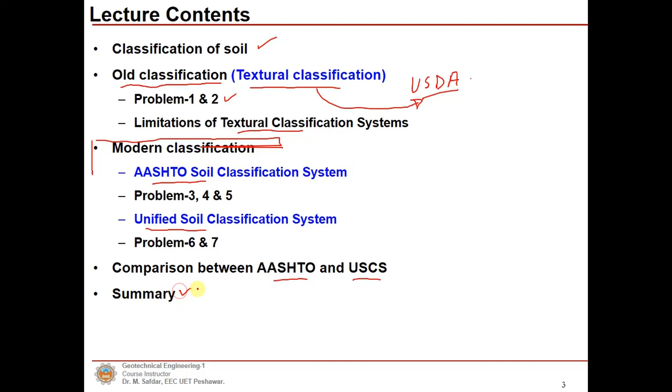Now, soil classification is the arrangement of different soils with similar properties into groups and subgroups based upon their applications. Now, what are those similar properties? For example, the compressibility of the soil. We can say strength characteristics. We can also say the permeability.

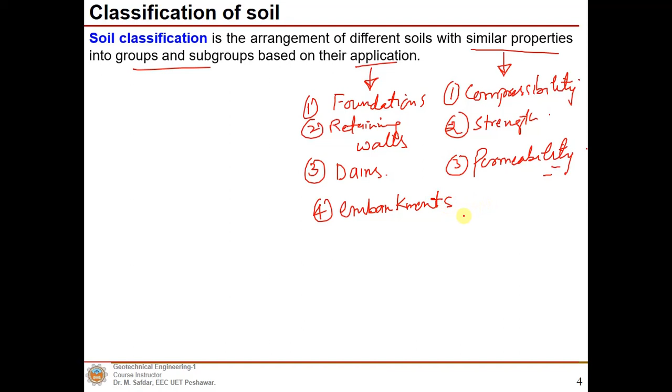Soils are classified in groups and subgroups based upon these properties. Now, based on the application, we can use them for foundations, retaining walls, dams, embankments, and so on. Now, different soil classification systems are available.

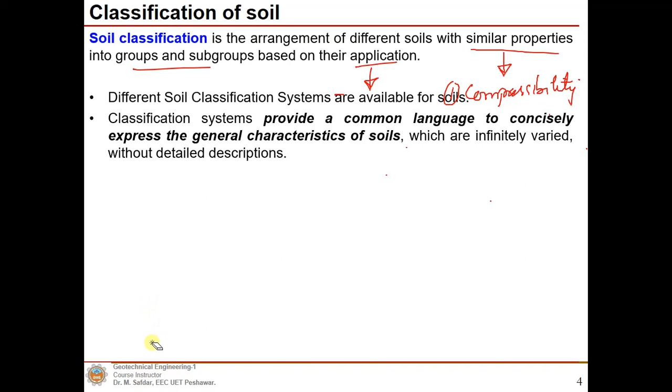So classification systems provide a common language to concisely express the general characteristics of soils, like compressibility, strength, or permeability characteristics, which are infinitely varied, without detailed descriptions. Most of the soil classification systems that have been developed for engineering purposes are based on simple indices such as particle size distribution and plasticity.

We already discussed particle size distribution, sieve analysis, and hydrometer analysis in our previous lectures, so you can refer to those if you want to understand how we do the particle size distribution for fine grained and coarse grained soils. We also discussed the plasticity of soils, for example liquid limit, plastic limit, and shrinkage limit, and in good detail how we can find out these limits.

Now, a soil classification system represents in effect a language of communication between engineers. When we are dealing with projects, structural engineers, water resource engineers, geotechnical engineers, and environmental engineers need a common language to talk about soils, and therefore a system is needed to communicate between these engineers during the project.

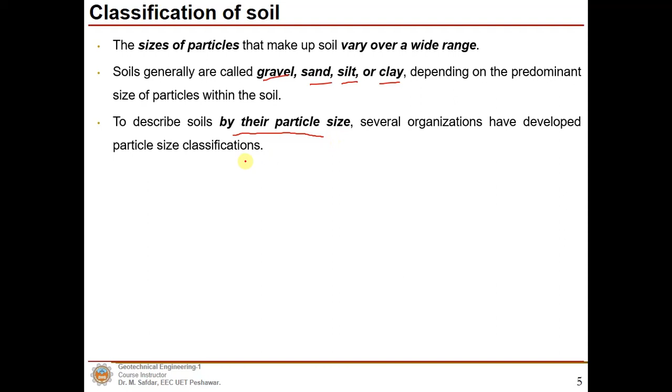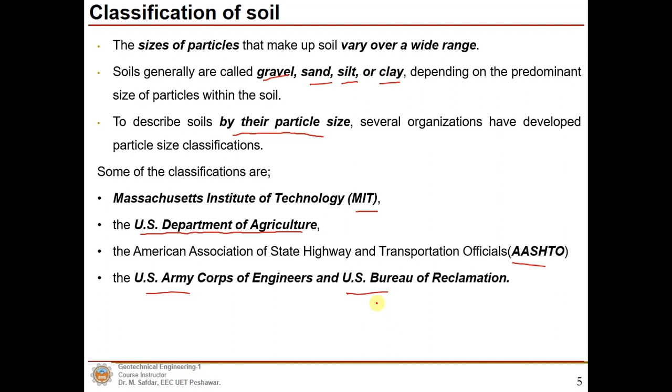Now, the sizes of particles that make up soil vary over a wide range, but soils generally are called gravel, sand, silt or clay, depending upon the predominant size of particles within the soil. To describe soils by their particle size, several organizations have developed particle size classifications: the Massachusetts Institute of Technology, or MIT, system; the USDA, or US Department of Agriculture, system; the AASHTO, or American Association of State Highway and Transportation Officials, system; and the US Army Corps of Engineers and US Bureau of Reclamation, which also proposed a soil classification system.

Now, this table shows the particle size classifications. The name of the organization is given in the left column. Gravel, sand, silt and clay sizes are given in millimeters. For example, in the USDA, or US Department of Agriculture, system, a gravel is a particle having a size greater than 2 millimeters.

Sand is a material having a particle range of 0.05 to 2 millimeters, and silt are those particles having a range of 0.05 to 0.002 millimeters. Anything less than 0.002 millimeters will be known as clay size particles.

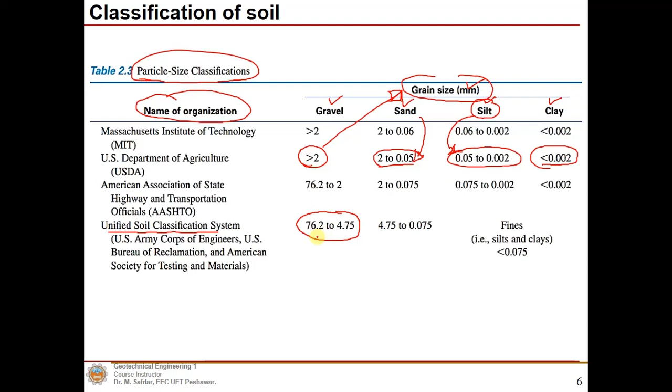Now, in the Unified Soil Classification System, any particle which ranges between 4.75 millimeters and 76.2 millimeters will be known as gravel, and any particle which ranges between 0.075 and 4.75 millimeters will be known as sand.

Now, the USCS, or Unified Soil Classification System, classifies silts and clays together, and any particles smaller than 0.075 millimeters are known as silts and clays, or fines.

Now, the classification systems developed in the past can be grouped into two major categories. One is the older classification, based upon textural classification, which is based on the particle size distribution, the percent of sand, silt, and clay size fractions present in a given soil. However, the modern soil classification systems take into account the particle size distribution and the Atterberg limits, for example liquid limit and plasticity index.

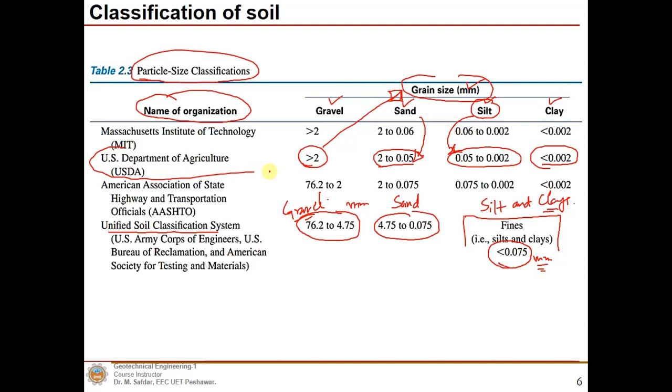Now, gravel is a particle which is greater than 2 mm. Sand is a particle which has a size in the 0.05 to 2 mm range. Silt: anything between 0.002 and 0.05 mm will be known as silt size material, and anything less than 0.002 mm will be known as clay size material.

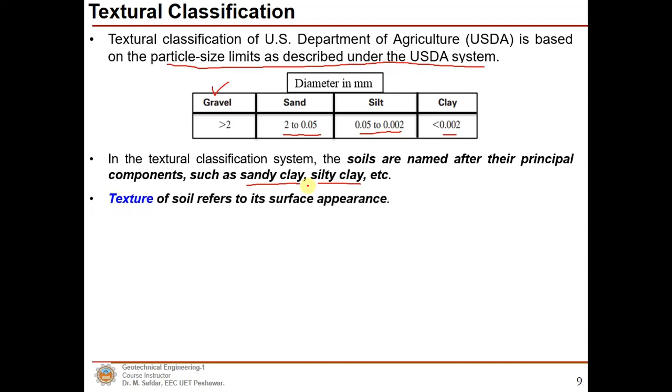In the textural classification systems, the soils are named after their principal components, such as sandy clay or silty clay. Now, texture of the soil refers to its surface appearance as well. Soil texture is influenced by the size of the individual particles present in it. Mostly, natural soils are mixtures of particles from several size groups. Based on the percentage of each particle size, for example sand, clay and silt, the soil type is determined.

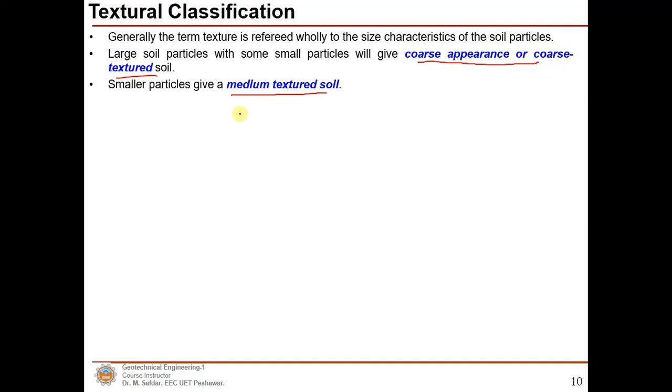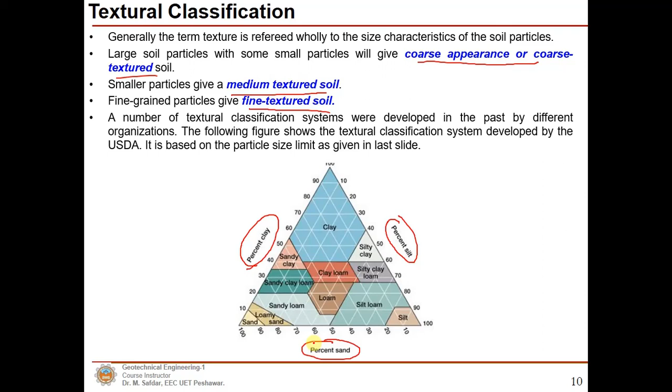Now, generally the term texture refers wholly to the size characteristics of the soil particles. For example, large soil particles with some small particles will give a coarse appearance. The following figure shows the textural classification system developed by the USDA, and it is based on the particle size. Sand is plotted at the bottom, up to 100% of sand.

Now, different regions are divided. For example, this one will be known as clay. This one will be known as sandy clay loam. This one would be known as loam. Here we have sand. Here we have silt, or silty loam as well.

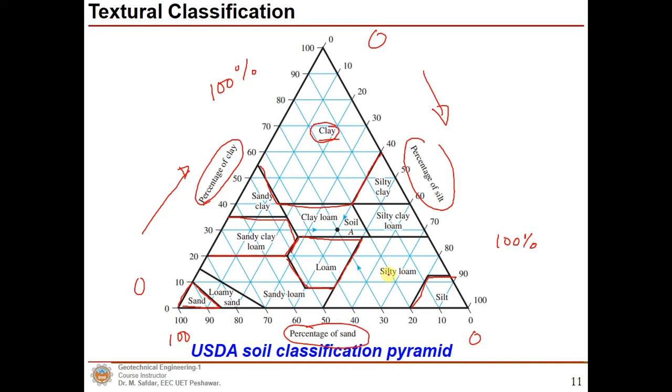Now we will solve a simple problem on it, then you will understand how we can find the soil classification based upon the US Department of Agriculture system. We need to find the classification of the soil which contains 30% sand, 40% silt and 30% clay.

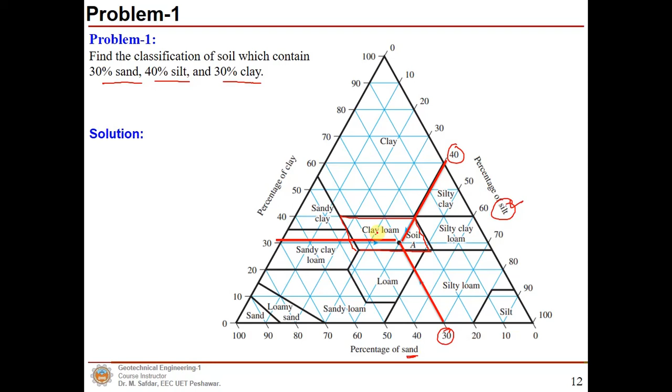Now, we can draw a line for 30% of the sand, and a straight line from 40% of the silt: 30% for the sand, 40% for the silt, and 30% for the clay. Now you can clearly see that this intersection point lies in the region of clay loam, so the soil can be classified as clay loam.

Now, loam soils are best for plant growth because sand, silt and clay together provide desirable characteristics; they leave spaces in the soil for air and water to flow and roots to penetrate. So these are the desirable characteristics.

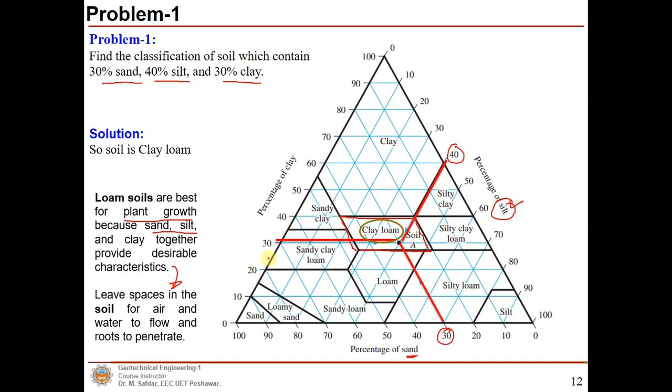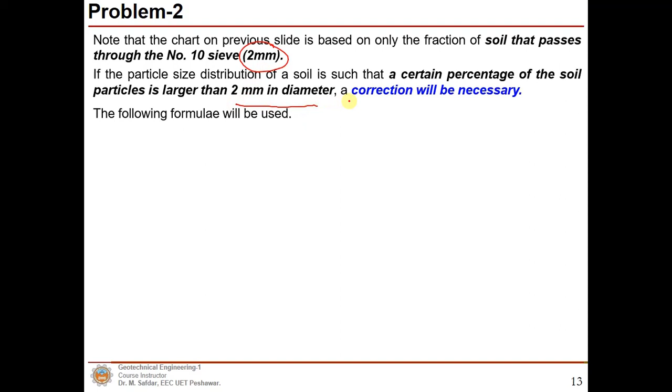Now, you need to note that the chart on the previous slide is based only on the fraction of soil that passes through the number 10 sieve, having a size of 2 mm. If the particle size distribution of a soil is such that a certain percentage of the soil particles is larger than 2 mm in diameter, a correction will be necessary. Now, the following formula will be used.

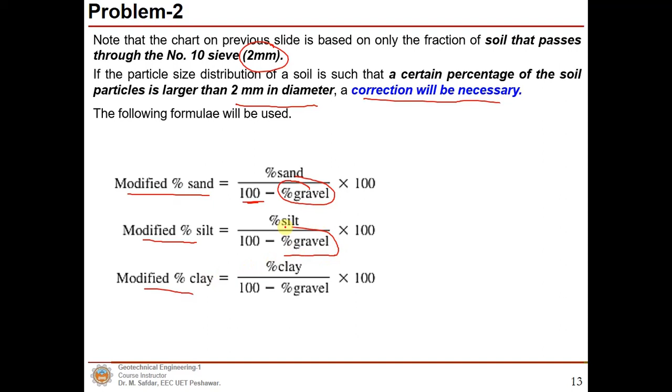We need to modify because we don't have any gravel percentage in that previous figure, so we need to subtract the percentage of gravel from 100%, and similarly we need to modify the percentage of silt and the percentage of clay by subtracting the percentage of gravel from 100.

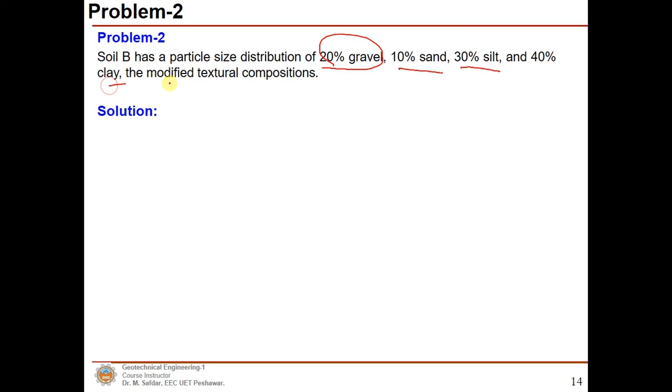Let's solve a simple problem. Soil B has a particle size distribution of 20% gravel, 10% sand, 30% silt and 40% clay. Now we need to find the modified textural composition. For the sand size, we subtract 20, which is the 20% gravel, and we get the modified or corrected sand percentage, which is 12.5%. The corrected silt size percentage would be 37.5%, and the clay size would be 50.0%, by subtracting the 20% of gravel.

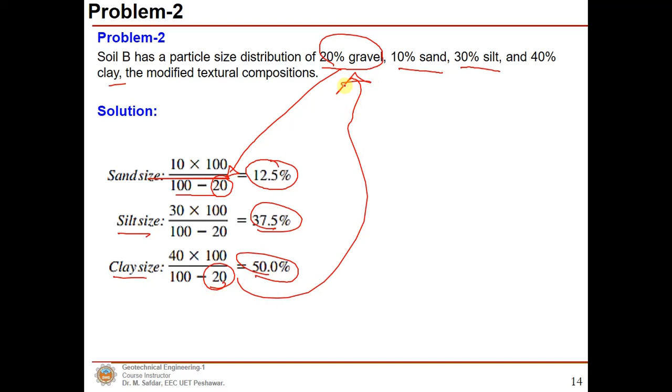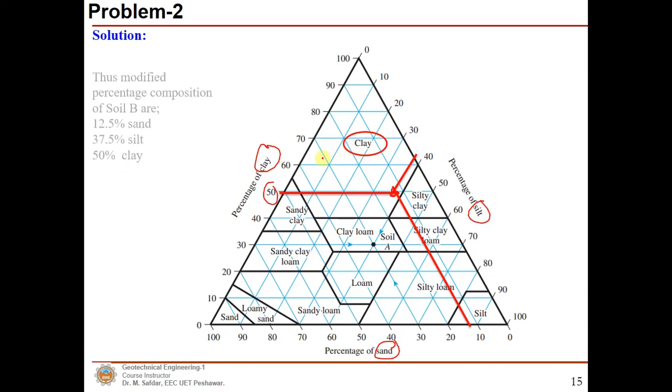So now we have 12.5% sand, this line is 37.5% silt, and 50% clay. Now the intersection point lies in the region of clay, so hence from the USDA pyramid the soil is clay.

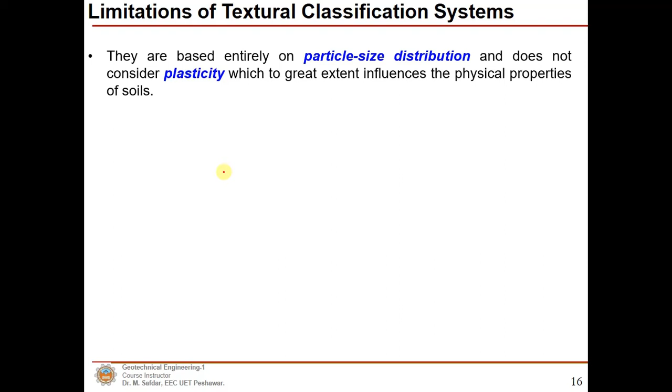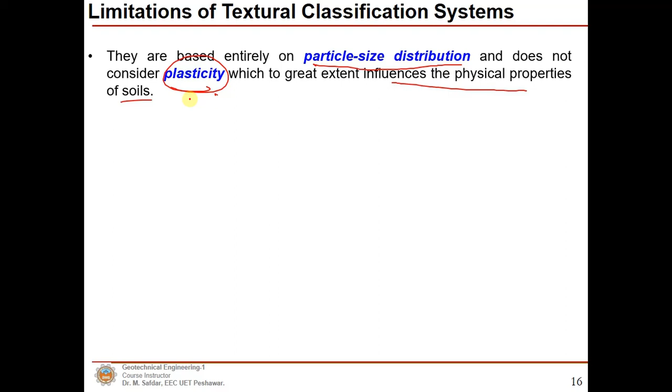Definitely there are limitations of the textural classification systems. They are based entirely on the particle size distribution and do not consider plasticity, which is an important parameter that to a great extent influences the general characteristics of soils, for example the strength, compressibility and permeability. Because textural classification systems do not take plasticity into account and are not totally indicative of many important soil properties, they are inadequate for most engineering purposes.

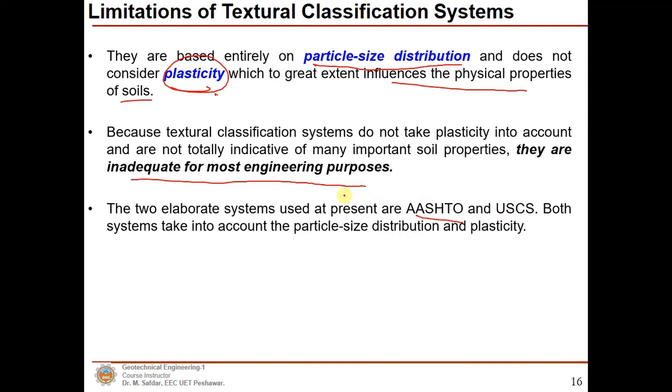Now, the two elaborate systems used at present are AASHTO and USCS. Both systems take into account the particle size distribution and plasticity. The AASHTO classification system is used mostly by highway departments. Geotechnical engineers generally prefer the unified system.

So that's the end of the introductory lecture on soil classification systems. In the next lecture we will study the modern soil classification systems.